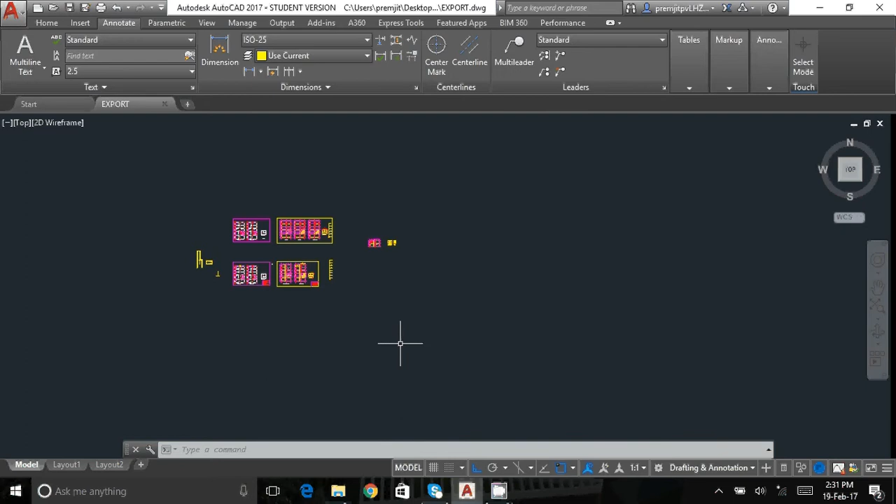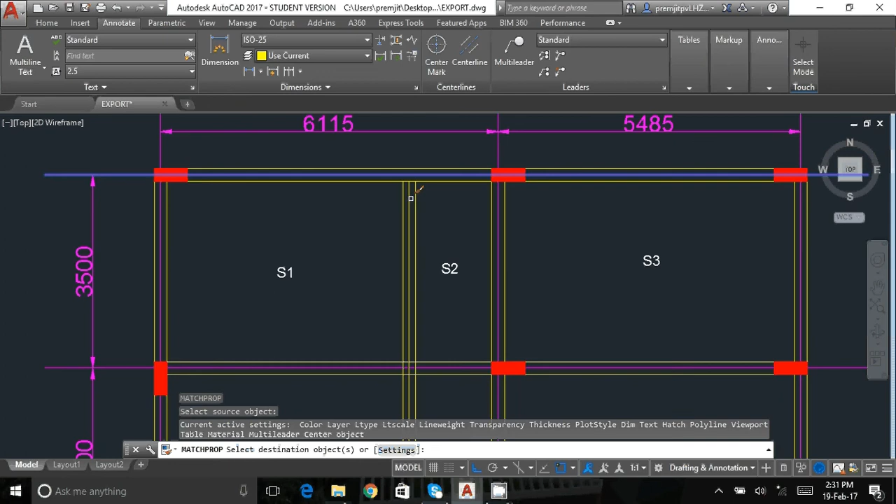So we are going to export a DXF file into ETABS. So when we have an architectural drawing like this, first thing that we need to do is we need to create a center line. So here I have already created a center line of your walls or beams, and then it is in a different layer. So here one line, if you want to take, I will match this and then make it into the same layer. So you have the same layer grids.

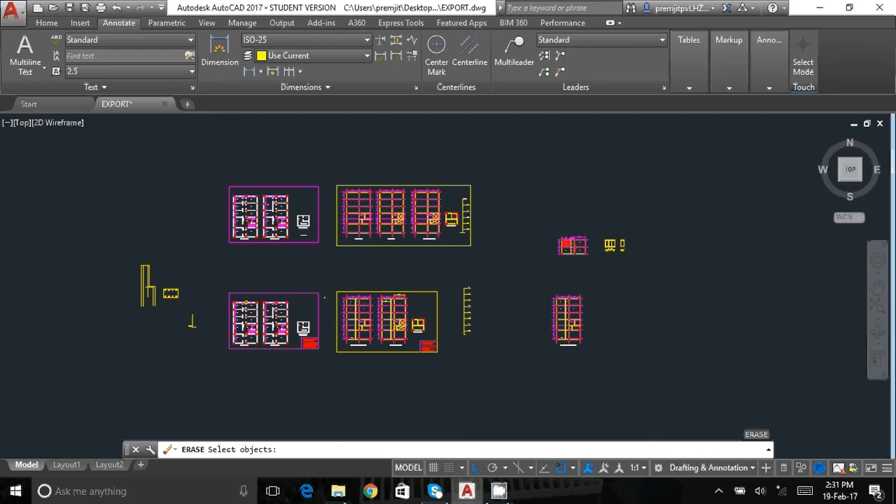So what I'm going to do is I'm going to copy this one particular plan and keep here, and then delete everything else. I don't want anything else in this drawing, so I'm deleting whatever is not required, and then I'm going to switch off the layers which are not required.

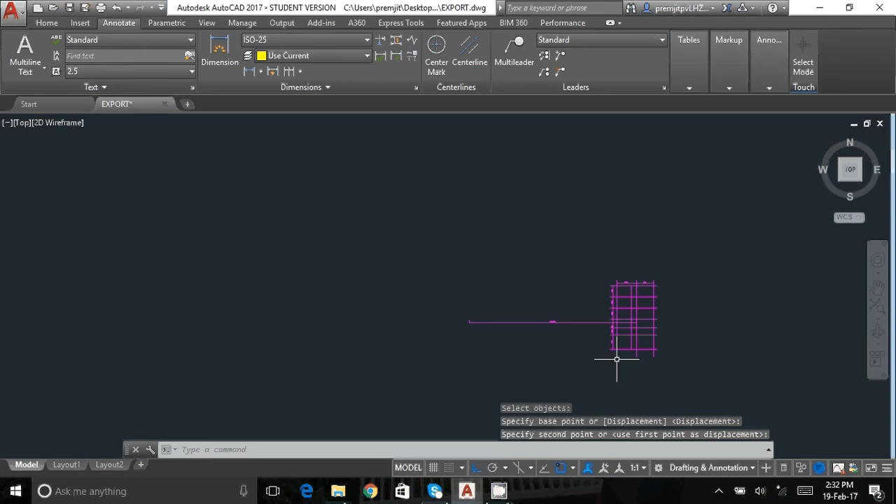Okay, and then I'm just going to move this so that I can delete whatever is not required by switching on the layer again. So layer, and I'm going to switch on all the things and then delete, and even these dimensions I don't want, so I'm going to delete this.

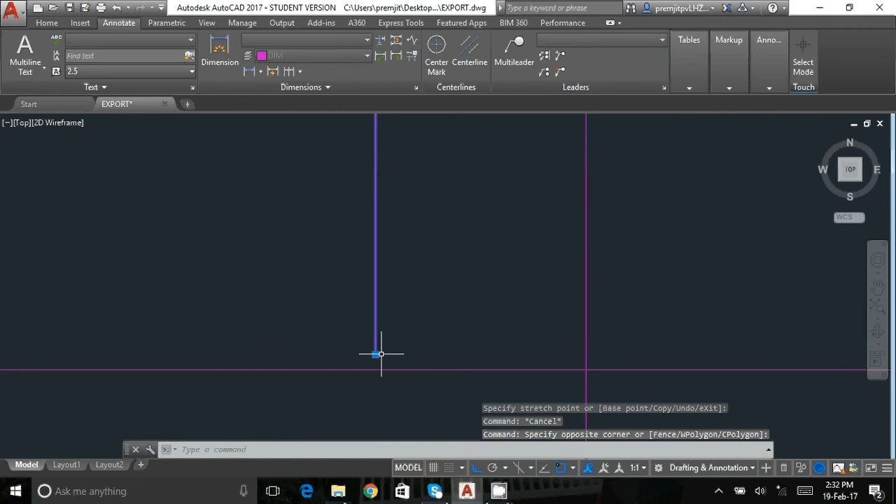Keep what you need. So I'm going to extend and meet this, and I'm going to meet this here, and if you want you can trim these and then keep it ready, but it's not really required. What we can do is just save this.

Now please note, it is better you zoom in, move this towards the origin. Even if it is not at the origin, it is not a big deal, but when you start modeling in ETABS, you will see it very far from your origin. So if you want it near your origin, what you do is you can switch on your UCS icon in

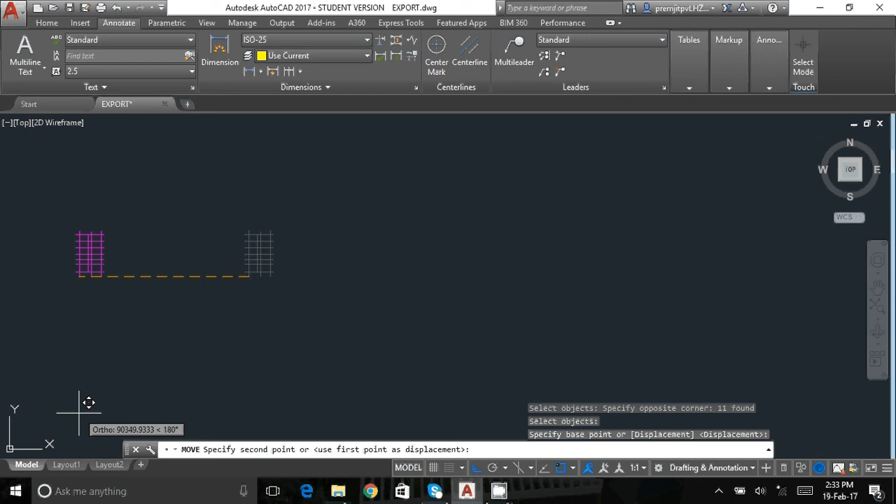AutoCAD and then move your file towards this as much as possible. Move, we can move to 0 0 0, but I'm not doing it, it's not really required. I'm just moving it closer to the UCS icon. Now save this. Now one more thing you need to know or do is you need to scale this.

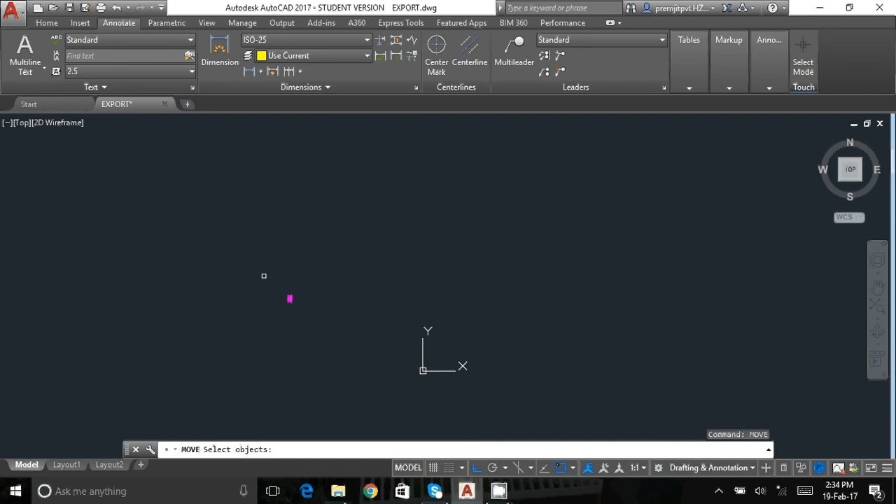Now if you see this, generally the drawings are in millimeters, so I will have to scale this to meters, better. So I will scale this by 0.001. So I have scaled this down. Now better again move this towards the origin. I will move this as close as possible to the origin, and then again save this, and now this time I'm going to save a DXF.

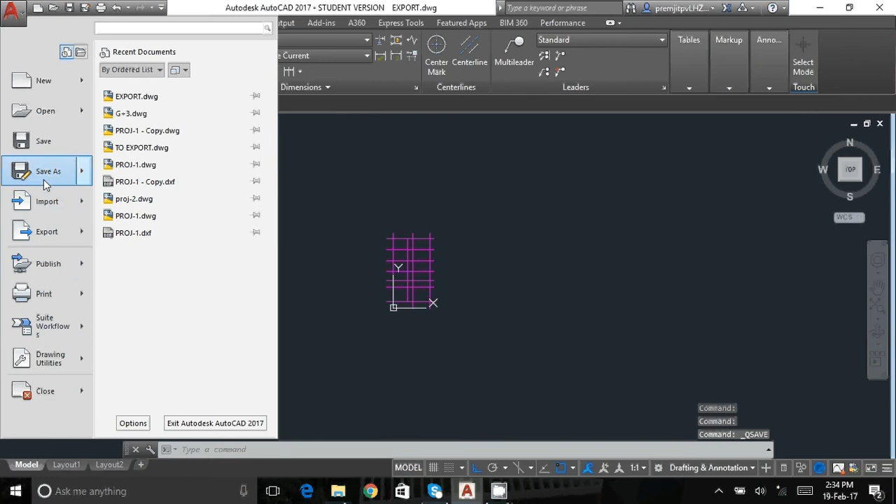So save as DXF. Now it is recommended you save in a very low version of DXF to avoid any version clashes. So it is better you save it in an older version and then save. Now it is saved there. Now it is also important you close these files now. After doing the DXF, you close that and then open your

ETABS and then go to file, import, and better you import it as DXF file of 3D model. It will ask you which file. You open this. Now select your layers. In your AutoCAD, dimension was the layer that you wanted, and then you say that it is in meters. This is very important, and selecting of that layer is also very important, and then say OK.

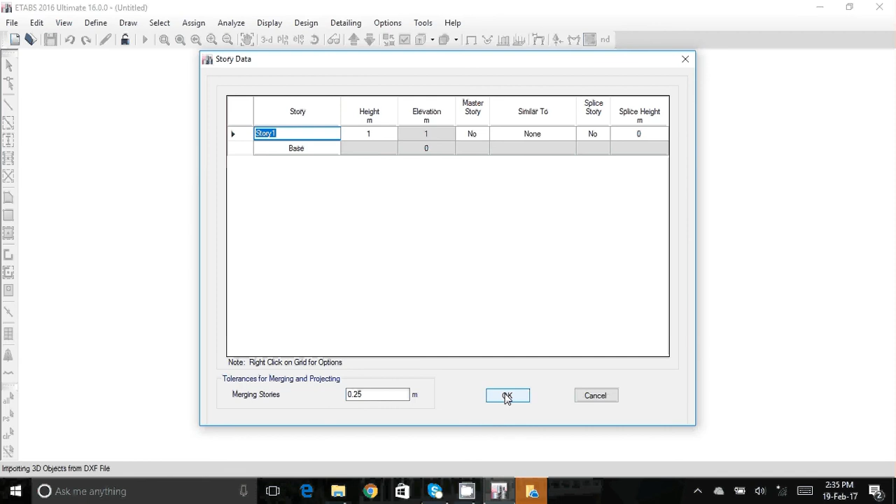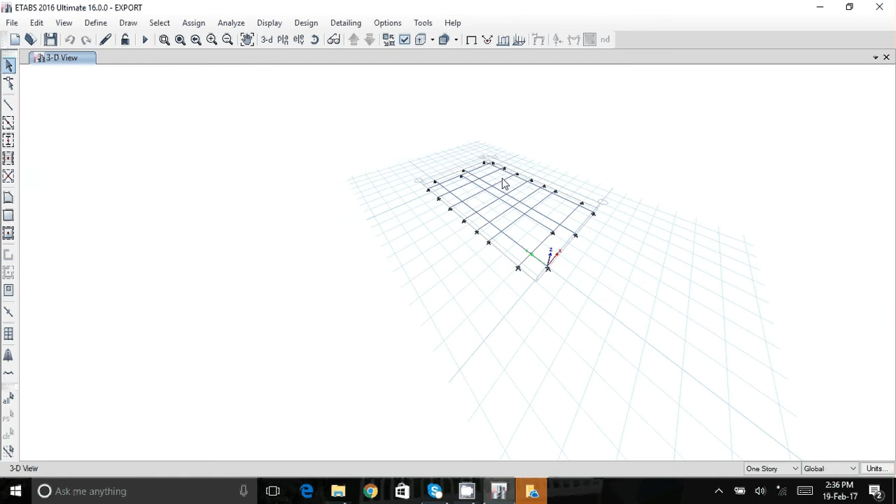Now it will ask you where you want that, then say okay. Now give a name to your file. I will say export and then say save. Now you close this. Now you can see that your members have come in your base level now. So go and switch off your horizon.

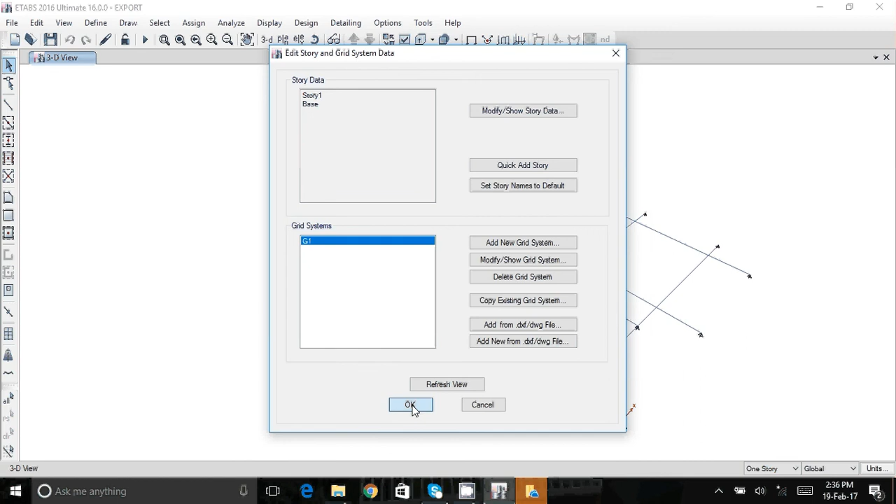I will also switch off the grids. Switch off the grids. Now edit stories, modify. If you want this to be 3 meters, make it 3 meters. If you want to add more stories, you add it. It's all up to you. Now click on OK.

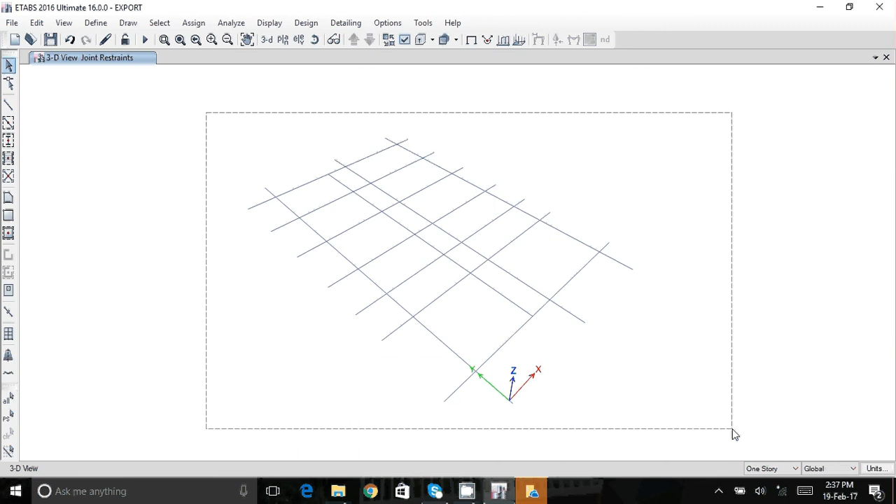Now if you don't want the supports to be copied, then select, assign joint, restraints, none, apply. Now you can also split it here, edit, divide frames, break it into sections and apply.

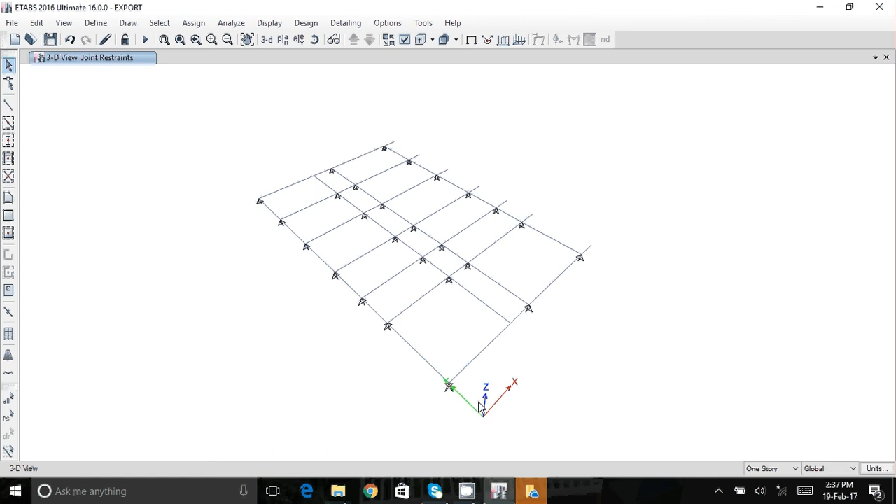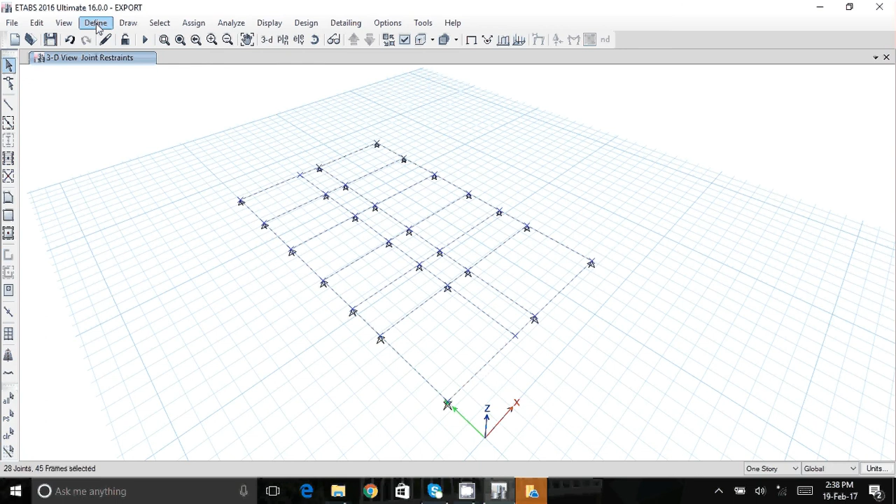Now what you do is delete what you don't want. Delete. Now even if you don't want these, delete. Save it. Now you can copy this into your next level if you want. Edit, replicate, story 1, apply.

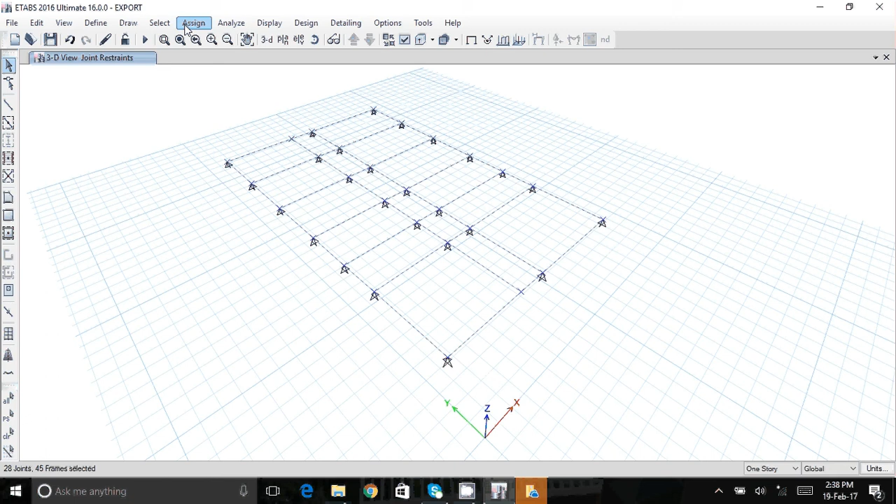Now go to plan base. If you don't want this to be there, delete that off. Assign joint, restraints, apply. So all the joints are gone. Now that's how you export.

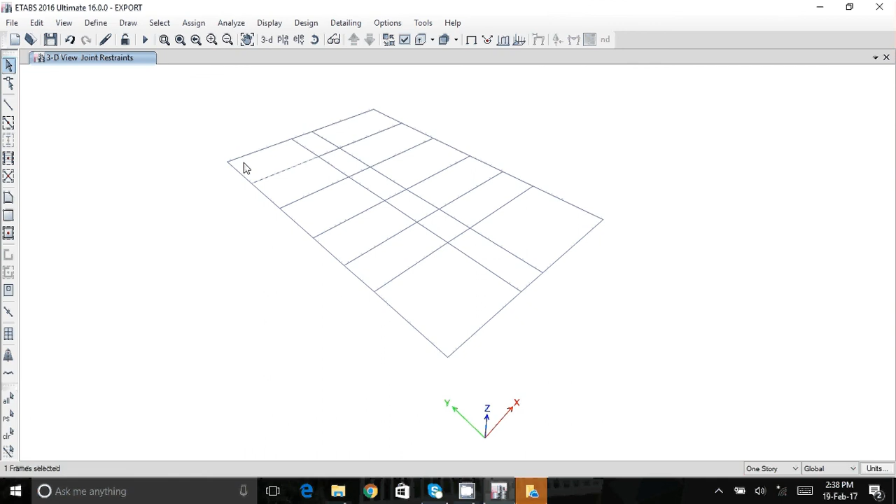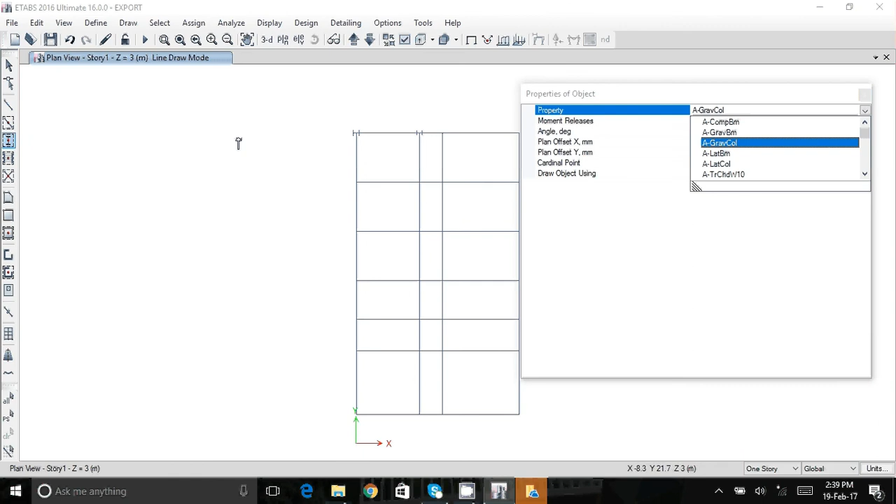Now you can start placing your columns wherever you want. You go to your plan and then place your columns. So whichever columns you want. If you want rectangular RC column, whatever you have defined, you have to define. If you don't have the particular column that you want to place, you go and define and place it. So this is how you make your model from the DXF.